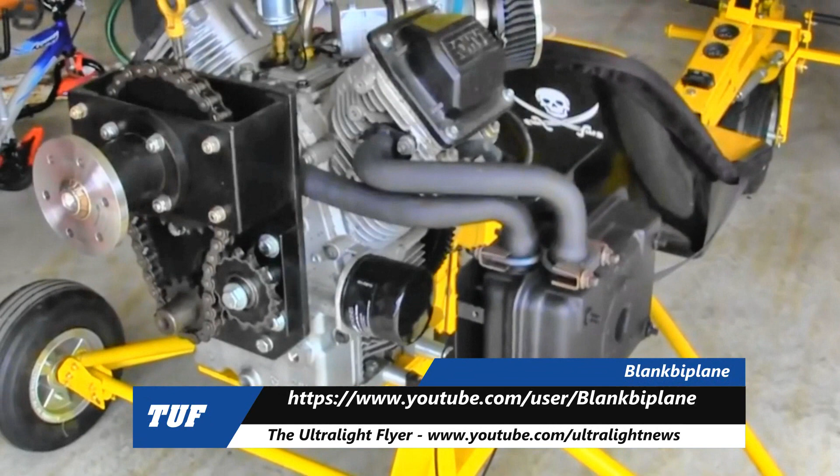This is a follow-up video from my first one on this trike. This is a Kohler 4-cycle engine. It's the 27 horse is what it initially started out with. If you watch the other video, you see a lot of the other modifications I've done.

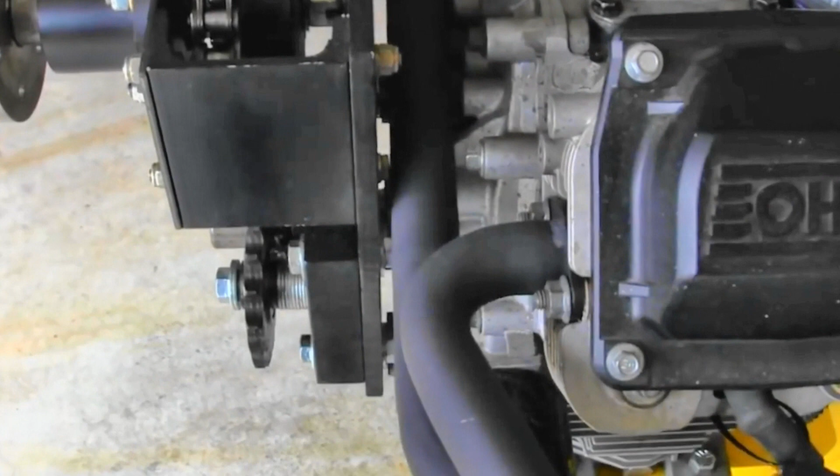Update on this is I've changed the exhaust system. This is a stock side mount Kohler oil filter side exhaust on it now, or muffler system. If you look, it attaches each side there, wraps around, it actually clears the reduction drive. Try to get a better shot in here. Come around, it's a lot quieter, very solid mount. You can actually push the whole trike by it and it don't even wobble.

Changed some other things. Got a 15 tooth idler sprocket on here now just to take up some of the slack. While the YouTube trolls were ripping me a new one on different things on this, it doesn't matter. I've talked to the chain manufacturers and they said it didn't matter that it had the slop in it. It doesn't hurt the chain at all, but this makes it a little bit nicer, neater looking. Adds more work and more weight to the reduction drive, but it doesn't do anything as far as performance.

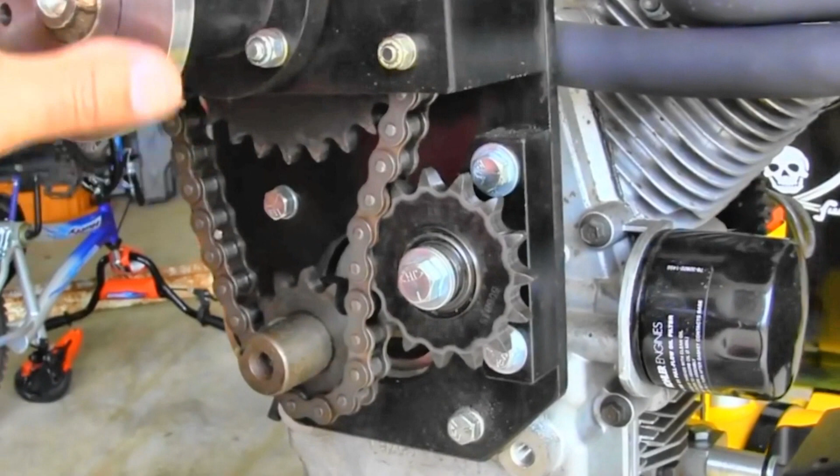You know, the belt, you obviously got to take the slack out of it, but this has still got a little bit of slack on it. Now once it's rotating with the propeller, this is going to pull tight, and then you'll end up with your slack on this side. Probably got a good 20 hours on this chain, and you know, there's absolutely no wear at all. You can see all it's done is wear a little bit of the oxide finish off the idler, and that's it.

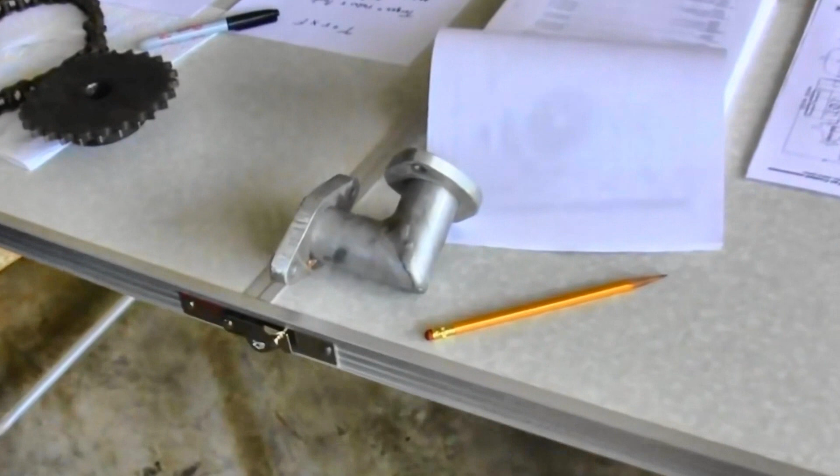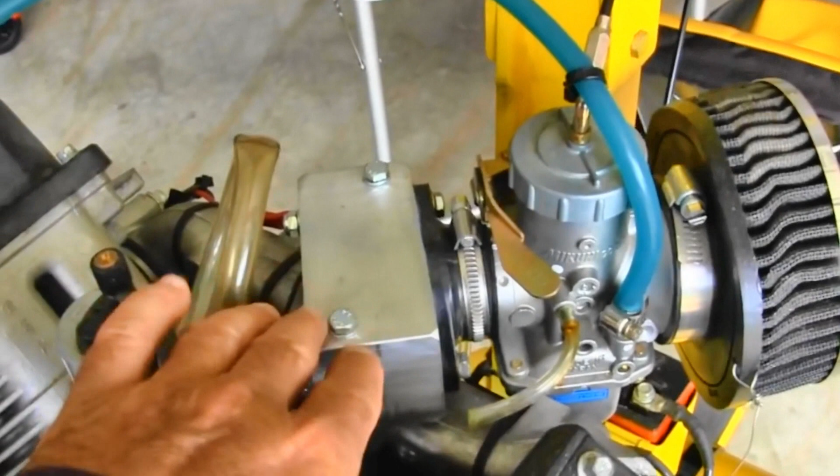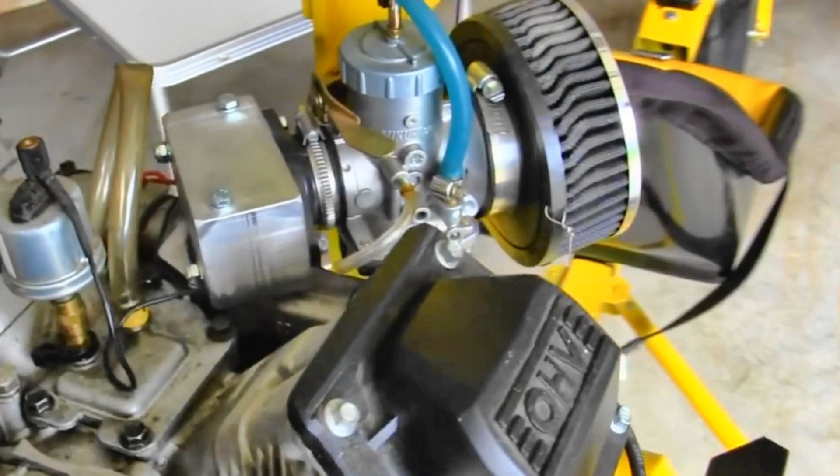Another thing I changed was the intake that I previously had was kind of an L-shaped one. Actually, it was this one over here. I'll show you. Took that off, looked like a plumber's nightmare there, so I changed it out to be a little bit nicer, neater package. Just a block of 6061 T6 aluminum machined out, and mount the carburetor directly onto that. So it kind of brings it a little bit tighter, looks a little neater, makes a nice, neater package to fit under some type of cowling or something if it was on a tractor configuration.

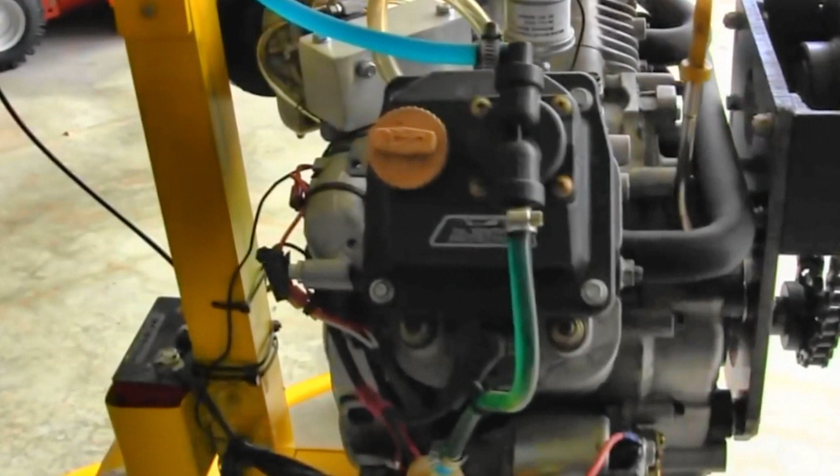It's really the only 2 or 3 changes I made was exhaust, the idler, and then that intake. Give you a little bit overview for those that's the first time seeing this one as opposed to the other one. Around here, I've had lots and lots of people asking why I went with chain as opposed to belt, and what was the limit a chain can do, and on and on. I think even in one of the comments I put a YouTube link to drag racing motorcycles to show that they're using a lot smaller chain than I got on this, and they're doing 200+ mile an hour in a quarter mile with them.

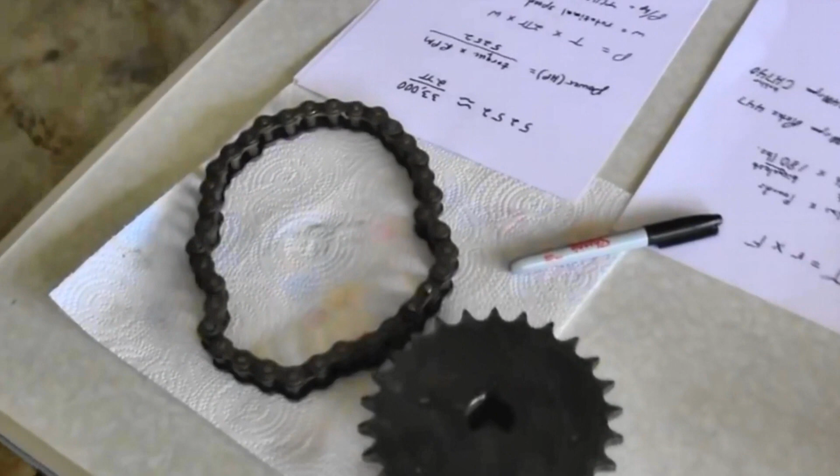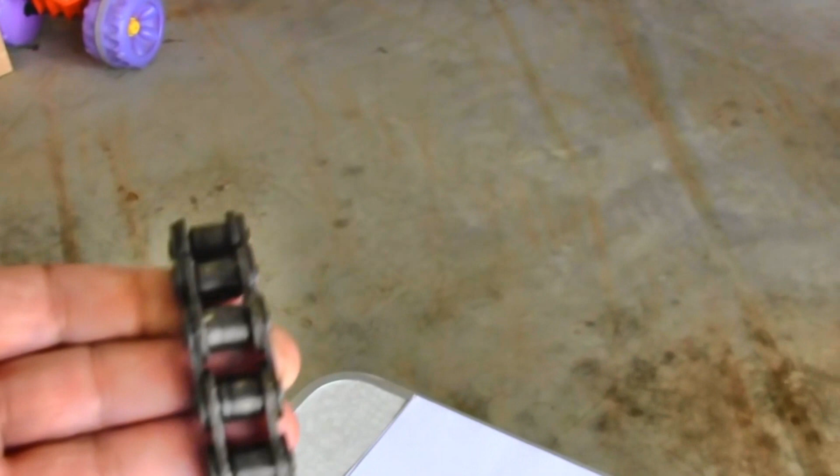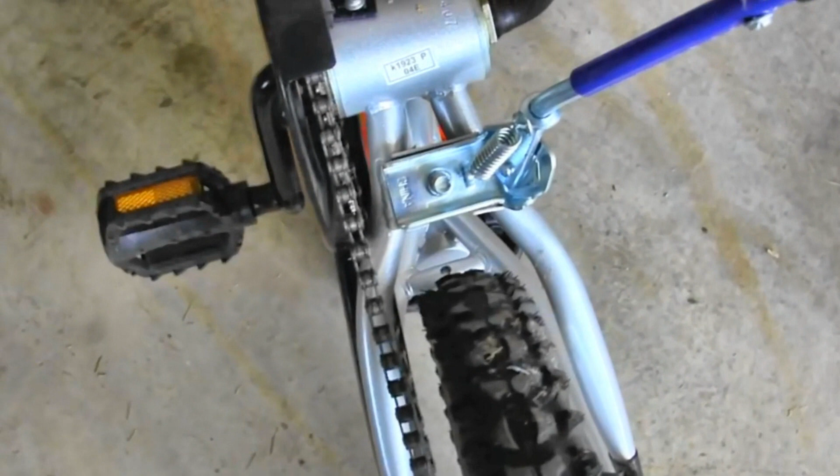And just to give you an example, here's the chain. This is just another chain that I had made on a different reduction drive ratio, so I kind of had it left over. But just to give you an idea of the size, this is 5/8 or 50 pitch compared to my fingers size-wise, and that's one of the previous sprockets I'd had. Let's do an example. This is my youngest kid's bicycle, and I can ride it, as embarrassing as it looks to see me on this thing. I can ride that, but to give you an example in chain size,

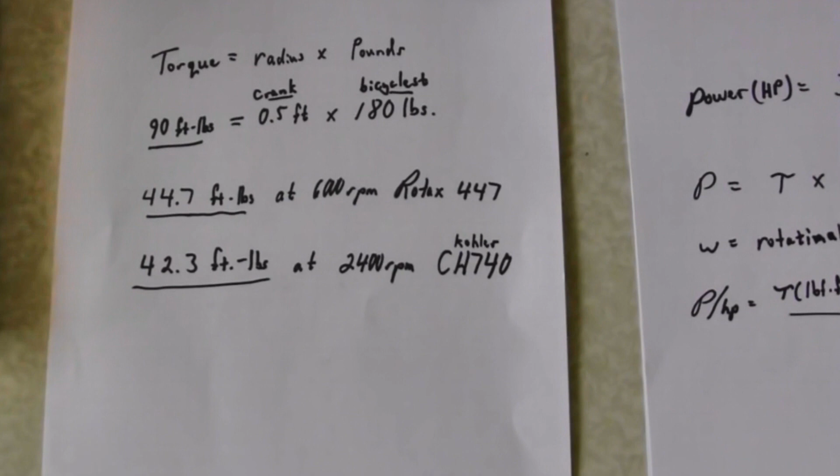and you guys asked for it, so now you're going to get it. We're going to do some math. Okay, just to give you an example. I don't know if you can see this or not, but I'll kind of go over it verbally. We have obviously your torque calculations here is radius times pounds, if we're going to go to foot-pounds of torque. And the Rotax 447, which is what I was trying to do here with this 4-cycle engine, was to mimic the 447 because they no longer make it, and to get away from a 2-cycle and the benefits of the 4-cycle.

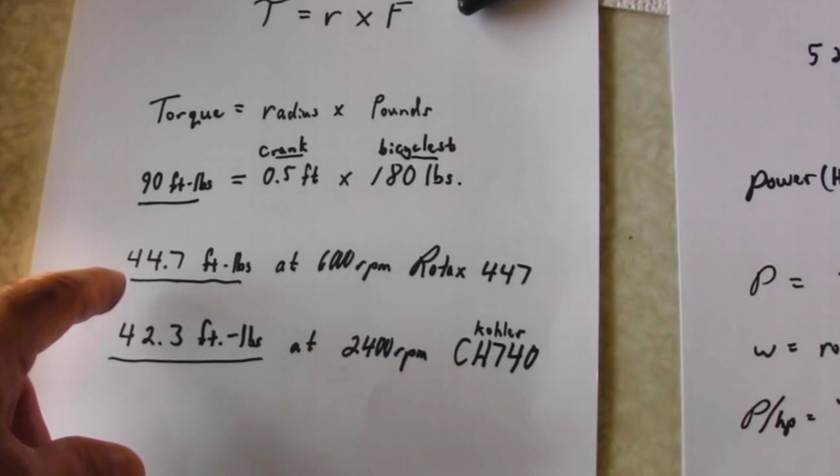Its peak torque is 44.7 foot-pounds of torque. This one here I've got from Kohler in their manual, and that's also from the Rotax one there.

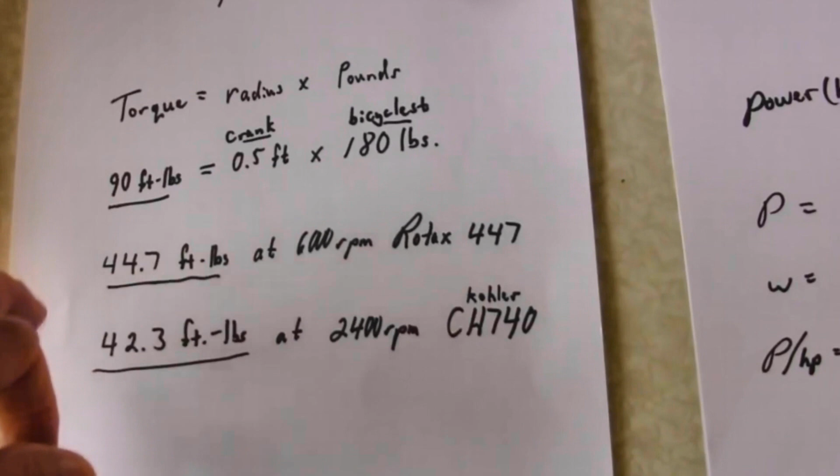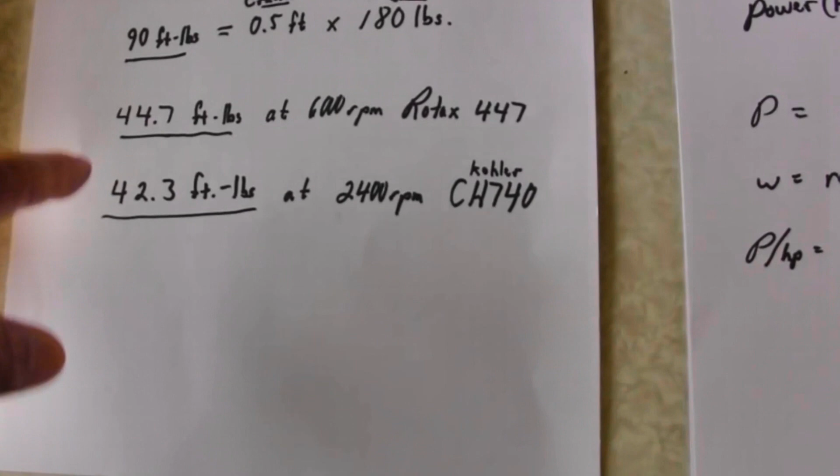It's 42.3 foot-pounds of torque. And then this one's for the 2 carburetor configuration. So it's their maximum they can get out of that particular configuration without other personal modifications people might do to them. Okay, so to give you this example, these are real close in comparison here as their maximum torque.

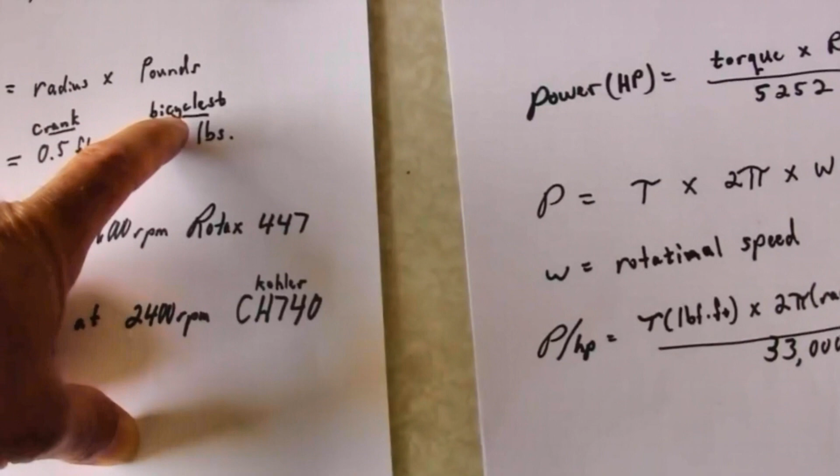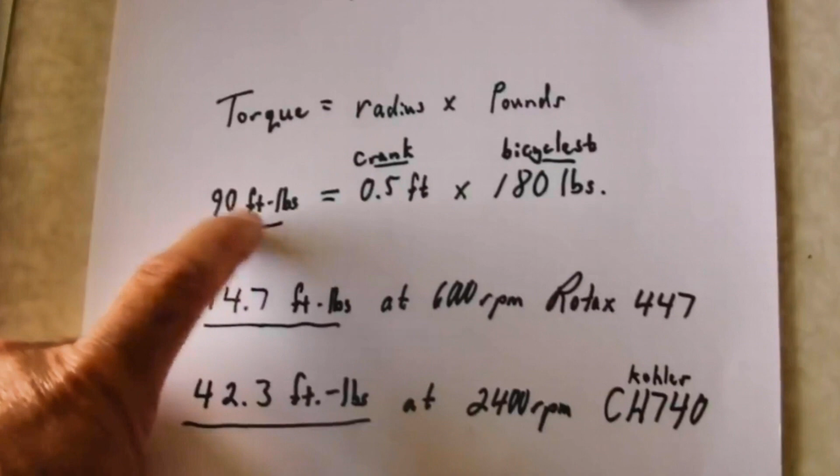Okay, now, a person that weighs 180 pounds riding a bicycle, and the crank on your pedal is about 6 inches, so that's a half a foot. That times that, you end up with 90 foot-pounds of torque. So when you're comparing chain to chain, I really don't even need a chain that big on there. Actually, half that size is all I need to run this.

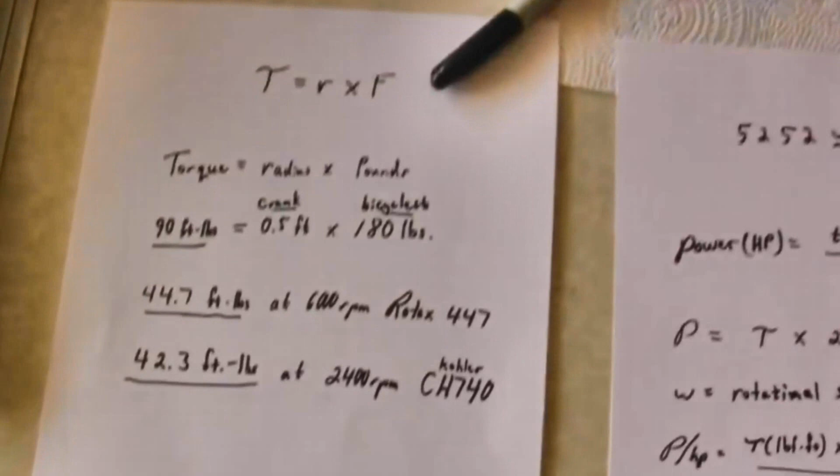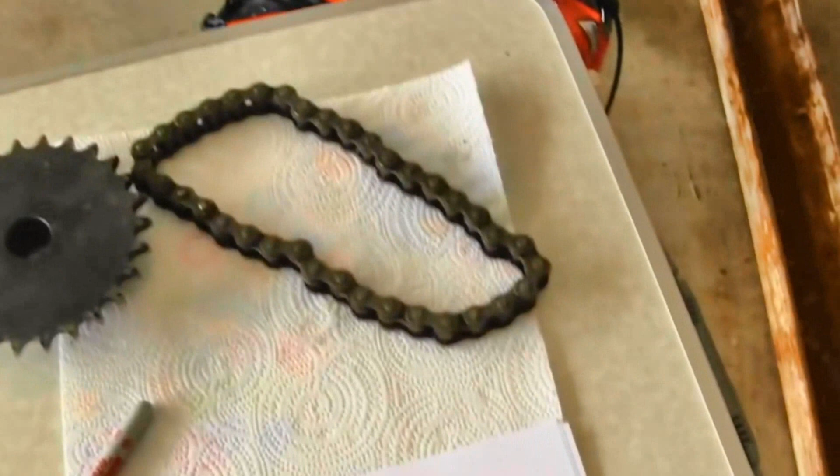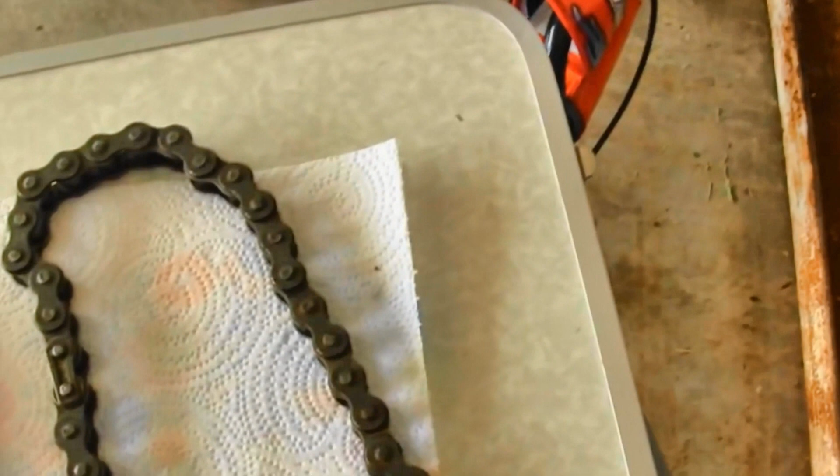Now obviously that's way overkill for what I'm trying to do here. But I don't want the problems of derailing or some kind of issues like that with alignment. This is a lot more forgiving because of the surface area of each roller, to be forgiving for slight misalignments or vibrations or something. Plus I never have to worry about this ever wearing out. Take a lifetime to probably wear that chain out. So just doing the math, and there's no magic, everything's math.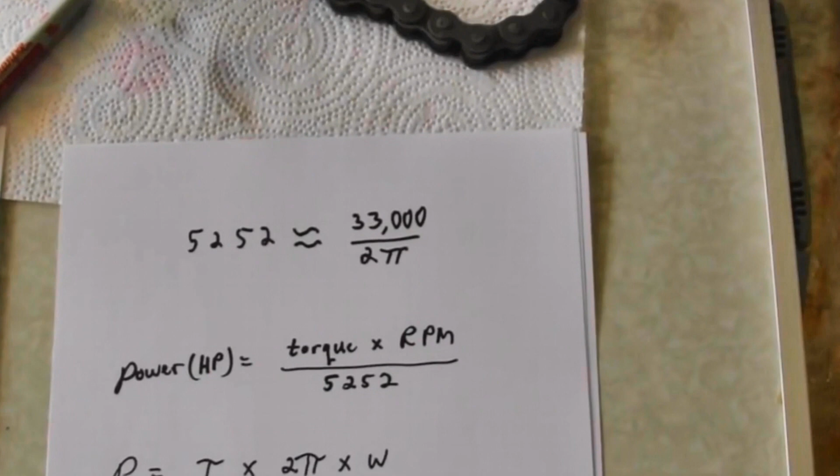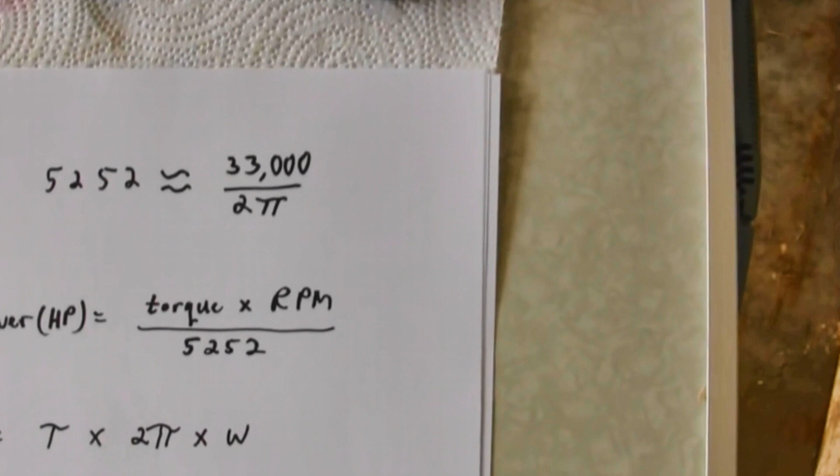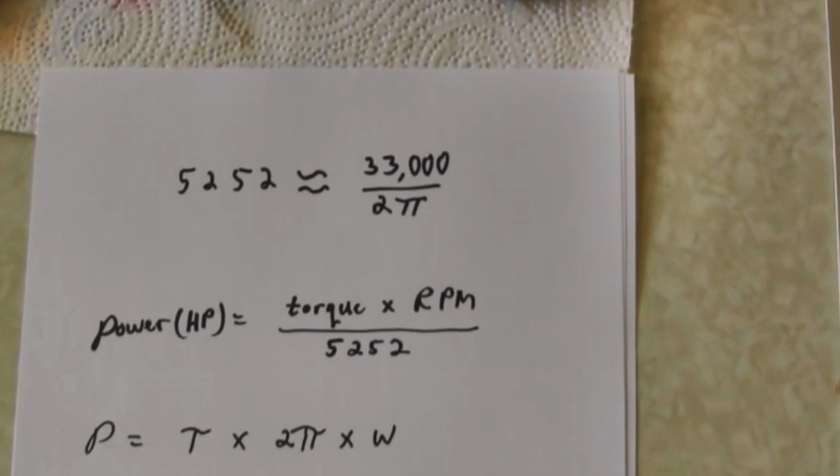Another thing is, I'd mentioned in the previous video the 5252, that's getting into where the calculation for horsepower was divided by 2 pi radians. When you're getting into the horsepower, if RPM ever reached 5252, these two would cancel, you end up with torque equals horsepower. So whatever your torque is, your horsepower would be at 5252 RPM. Like I said, I do all the math and everything's real simple, straightforward to me.

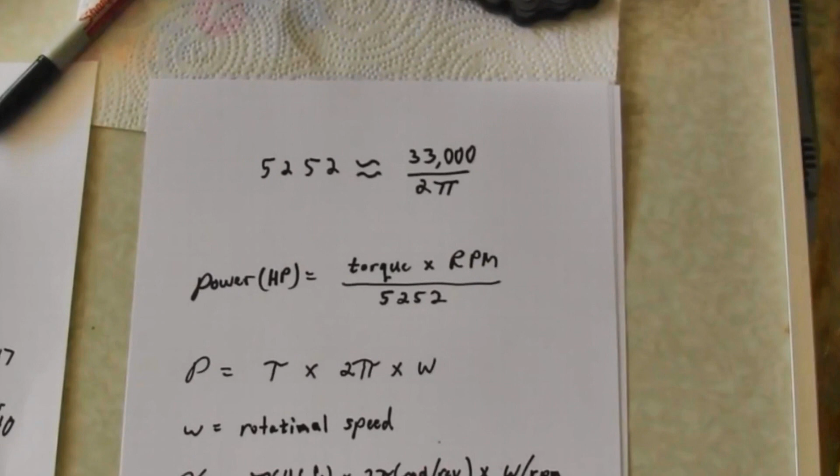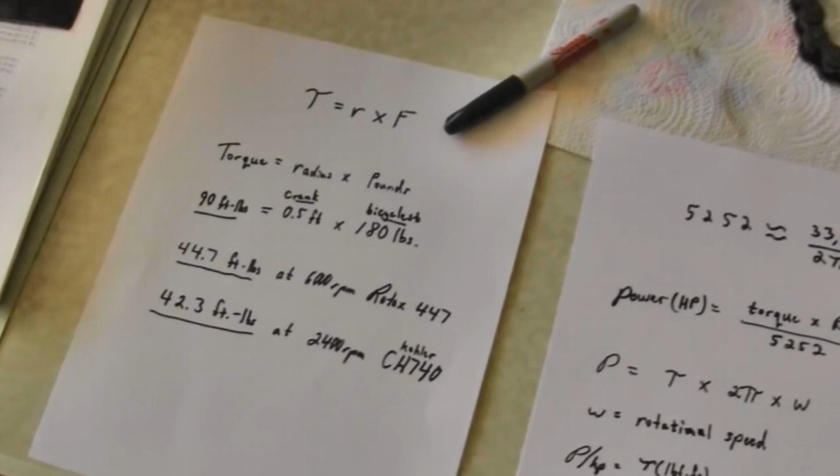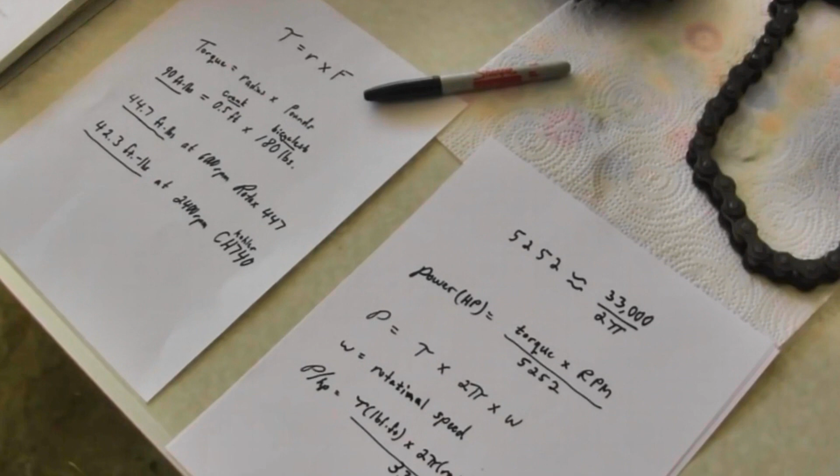A lot of people had superstitions and folklores about the chains and stuff like that, and talking to people that manufacture chains, they got a kick out of it. But your chain's never going to wear out. Same as, we've been riding on motorcycles for 100 years, and the motorcycle people hate belts, and the airplane people hate chains, and it's all superstition in both directions. When you actually do the math on it, there's nothing wrong with belts. Belts work great. I just don't care for the belts for lots of ergonomic reasons.

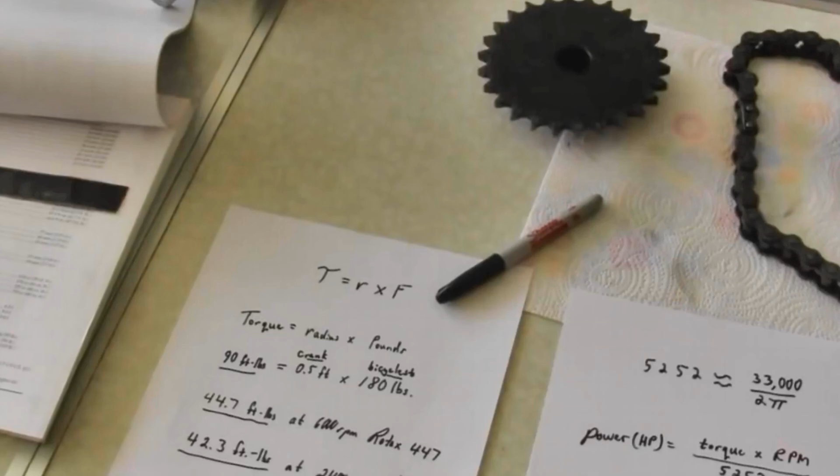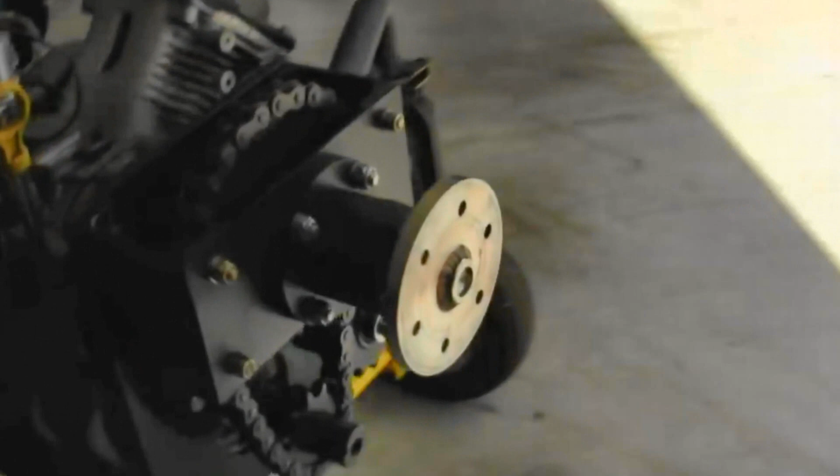If you're not using a timing belt, then you got the potential of slippage. In a pusher configuration, if you get any oil leaks, it could spray onto the belt, which could cause slippage. May or may not be any kind of an issue at all. I've had belts on things that work great. So I got nothing against the belt, but the reason I went with chain was just because it was very simple to design.

I didn't have to worry about alignment issues like I did when I was trying to develop a belt system. I had one of the belts get ate up on me and it was perfectly aligned. I maybe had a bad belt and it just came apart, but it was not something I wanted to experience in flight.

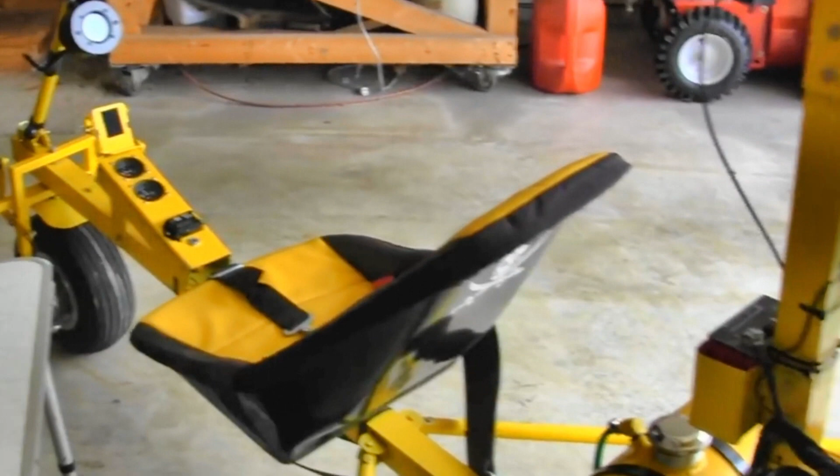I got the propeller off this just so you guys can get a better look at it. I'll put the propeller back on, fire it up, and if there's no neighbors around, I might shoot around the neighborhood in it. Obviously it's a wing-off, but just give you kind of a follow-up because I had enough requests asking for one, and just to show some of the more modifications to it. I figure I'm pretty much done with whatever I wanted to accomplish with this, so I'll probably end up selling this particular trike because I got another project I want to start on.

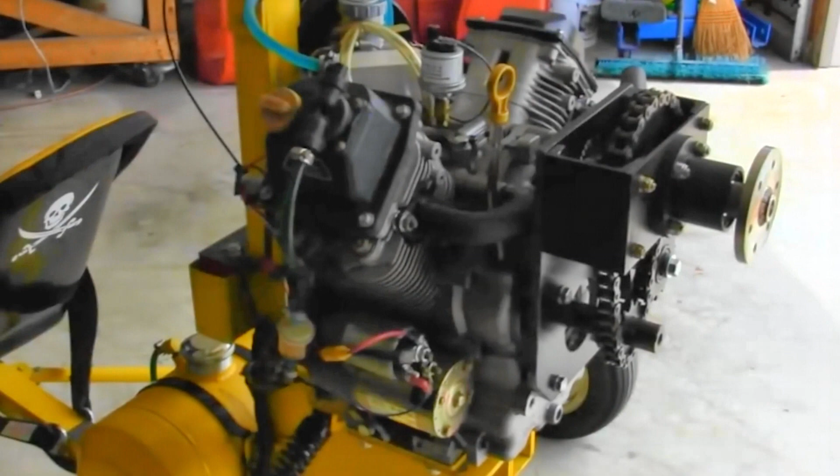Anybody that knows me knows I just enjoy designing and building, and once I'm done with them I usually sell them and start another project. It's kind of like one of these things where I just enjoy the challenge of it more than the piloting part of it. More of a designer builder than pilot. Actually kind of stink as a pilot, so better at designing and building.

So anyway, just give you a follow-up and then I'll fire it up from there, and I may not say much after that.

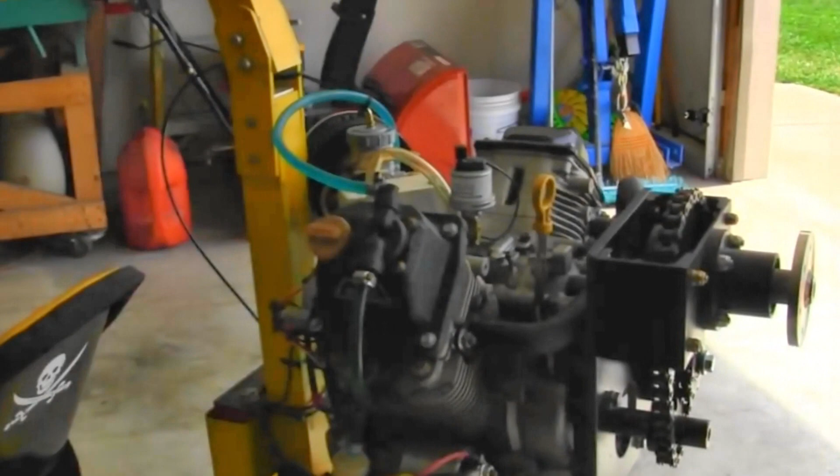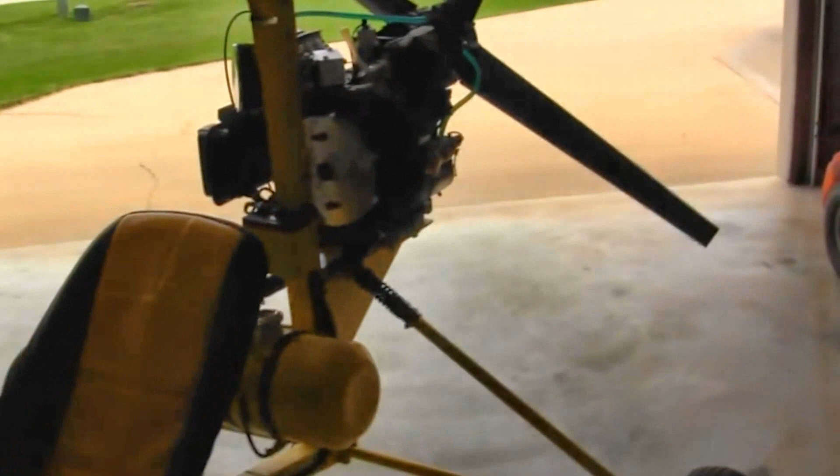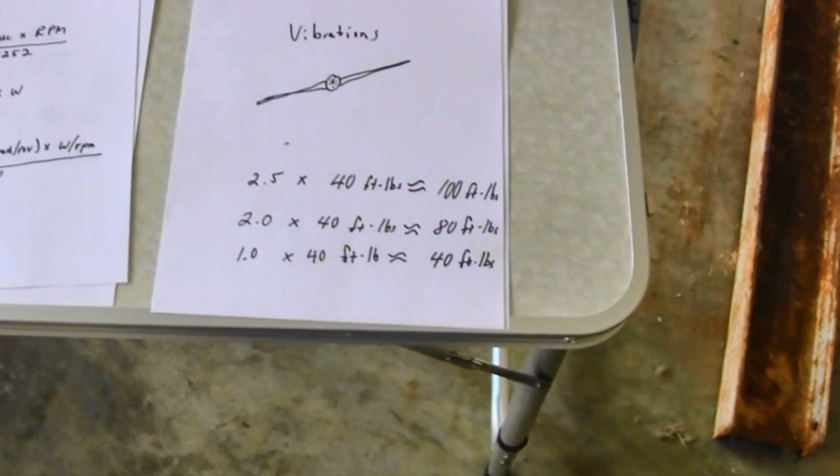Sorry I didn't get this fired up yet. I got the propeller on, but I thought of a couple other things that I need to go over real quick, just from the questions I've had. People were asking about vibration from the chain. It doesn't matter if you got chain, belt, geared, doesn't matter. If you're getting vibration, 99% of the time, and this is my experience with lots of different propellers, your vibrations come from your propeller, not from your engine.

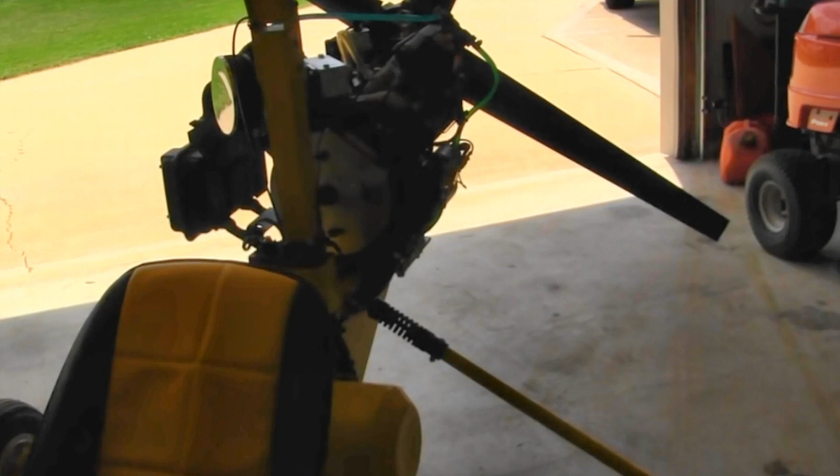Because if you can take the propeller off the engine and run it and you get no vibration, or just minimal like you would a riding lawnmower or anything else, that's what you should be getting, because the internal parts on the engine are already balanced, so there's nothing else there that can vibrate. And even with a single piston, that riding lawnmower is a single piston, and they don't shake or vibrate, just the normal pulses that you feel, but it's nothing uncomfortable.

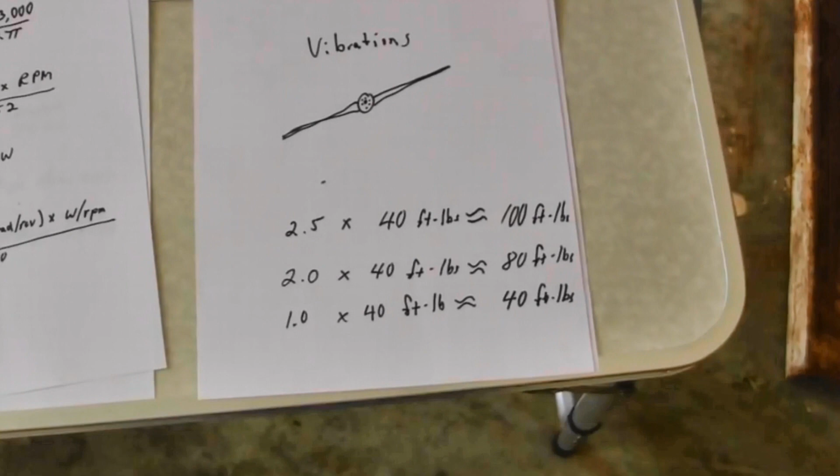The vibration almost always comes from the propeller. I've bought everything from these Ultra Props all the way up to the Powerfins, and I'm trying to think of the other one I had that was like a $1,000 propeller. Every one of them out of the box was out of balance, and I had to balance them. Once you balance them, they're smooth as glass, because it's just another flywheel. So if you balance it, it's just going to stabilize it even more.

Another thing is, people have asked me about direct drive right out of the engine. Two things. One is, when you run direct drive out of any engine, you have to have a thrust bearing in there. That means all the load being pulled or pushed on the crankshaft is being absorbed by some type of bearing that is not just your radial bearings for your connecting rods and such. It's actually a thrust bearing at the end or the beginning of the case of the engine to compensate for that amount of pulling or pushing that's going on.

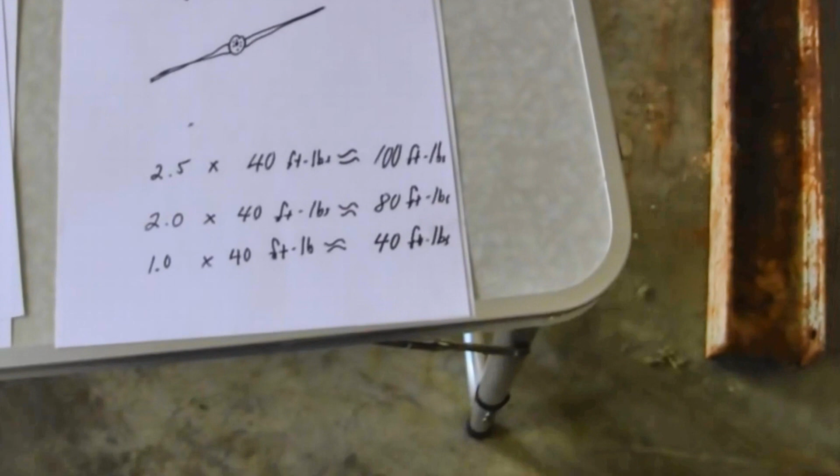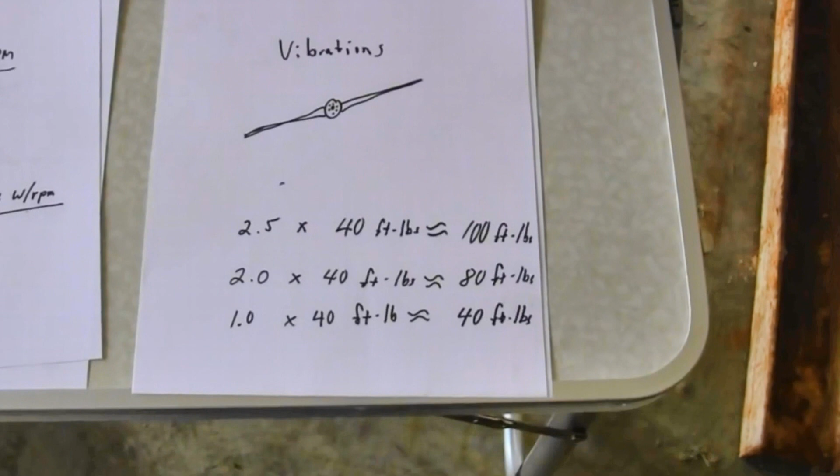When you're running through any kind of reduction, you don't have to worry about that, because it's all radial forces and you don't have a forward or backward pull or push on it. The other thing that happens is, let's do the math again. This is a 2.5 to 1 reduction, so you're taking the 40 pounds of torque roughly at 5,000 RPM, and you're getting 100 foot-pounds of torque at the propeller.

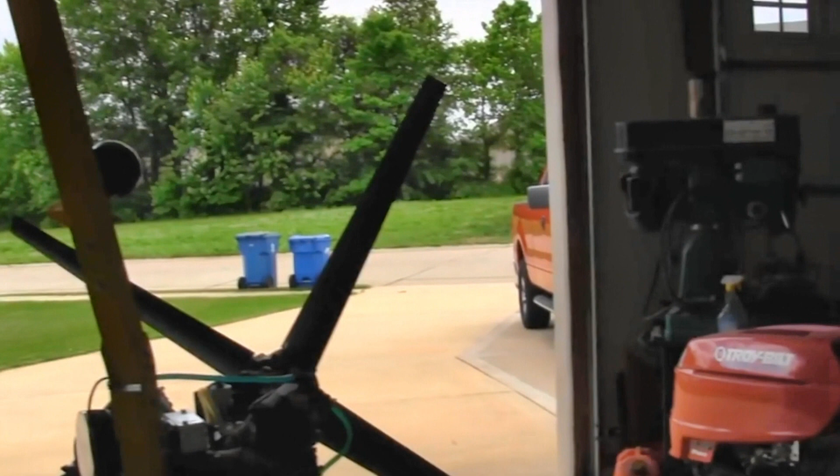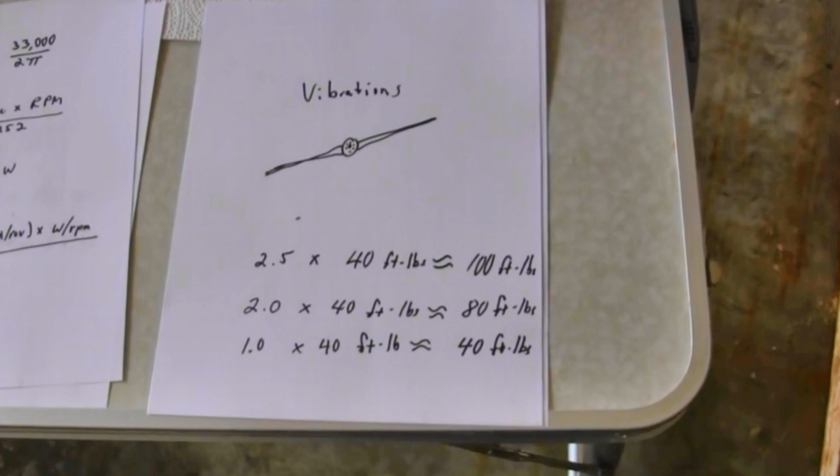Now the larger the propeller, that counteracts that, because imagine putting your hand on a small propeller and rotating it versus one that's way out there. It's a lot easier to rotate one that's further out based off the torque formula. So you're counteracting that with more power to the propeller, because the whole radial area of the propeller is compressing all that air. A smaller propeller, or a single-blade or 2-blade propeller versus a 4-blade or 3-blade, you can see that it's a lot more area being compressed. So obviously the bigger the gear ratio, the more power you're getting right to that propeller.

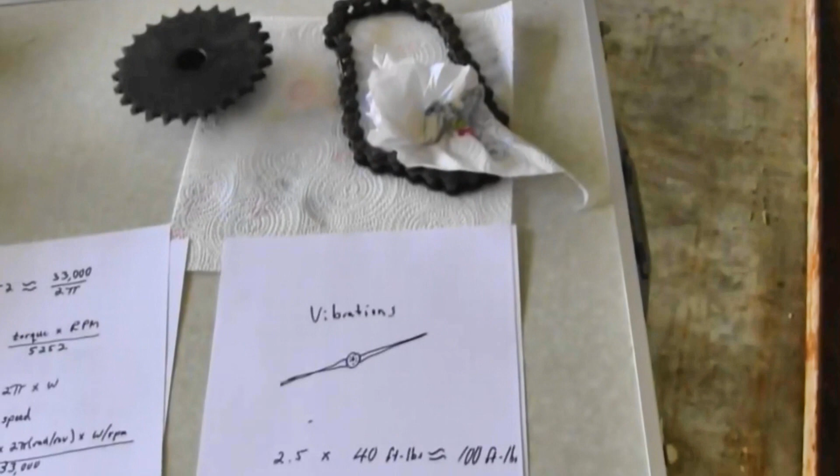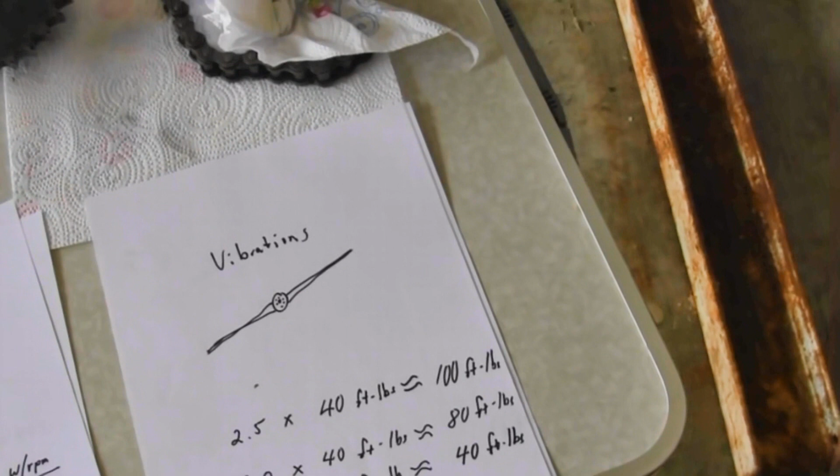At 2.0 to 1, you're only getting 80 pounds of torque at the propeller, but you're gaining speed. Your compromise is that you're able to run the engine a little bit slower. You can't run the propeller tips faster than the speed of sound, or you end up with, one, a horrible noise, and two, horrible inefficiencies. And if it's a direct drive, you're only right at the 40 pounds of torque, which is not much at all. But again, you get a lot of speed, and if you have an engine that has a thrust bearing, it'll take care of that.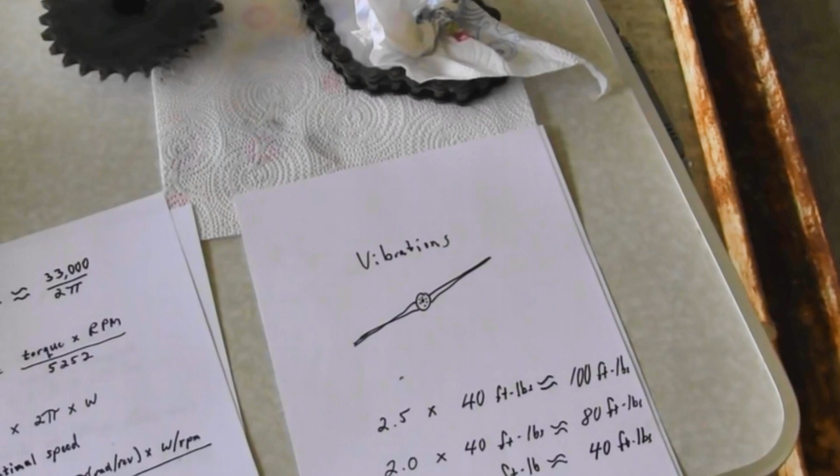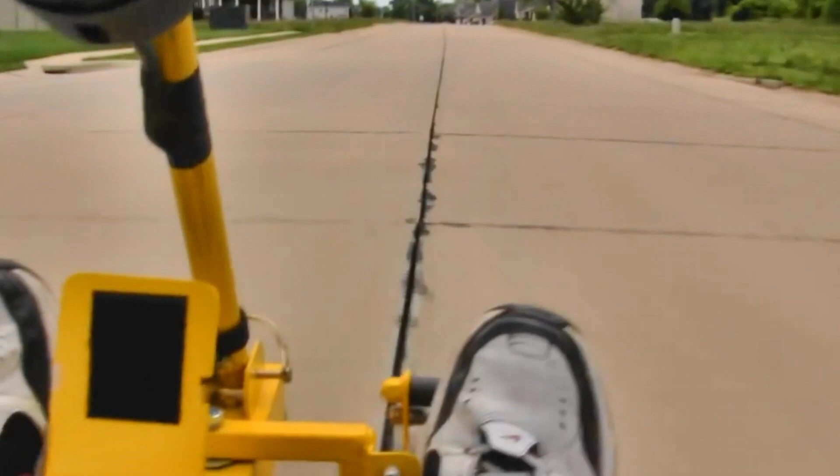So anyway, just some more things to go over real quick before I shut this off and fire this thing up. Okay. Let it warm up a little bit.

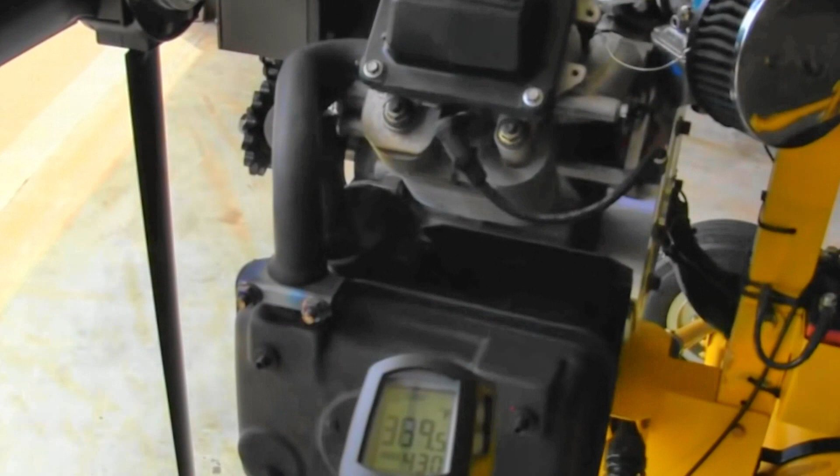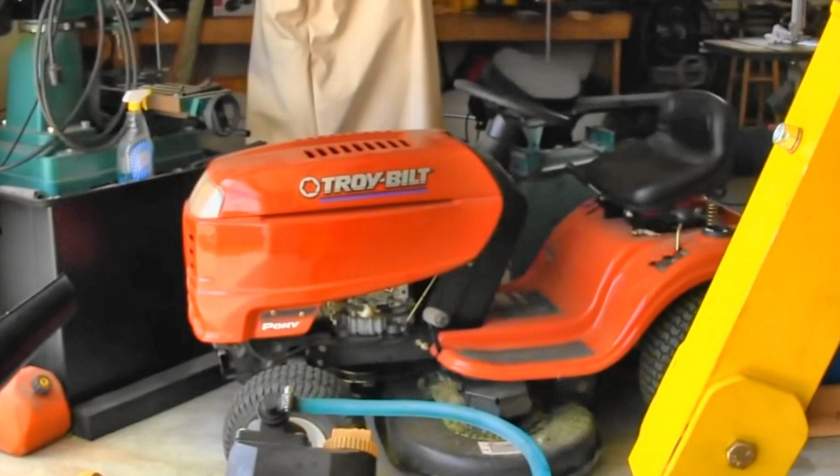Okay, let's check some temperatures real quick, before the neighbors freak out. Let's see what we got. Exhaust temp, around three, almost 400. Cylinder head, 170 something is the highest. Chain, 100 degrees. Outside temperature, 85. What else do we want? Oil filter, about 180.

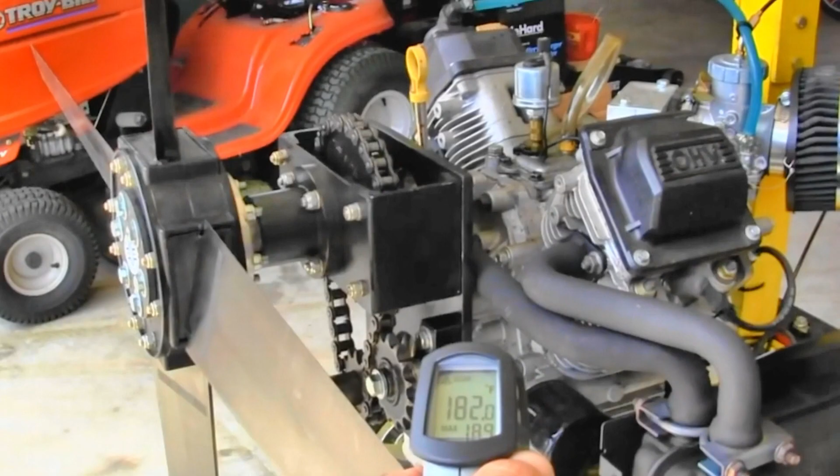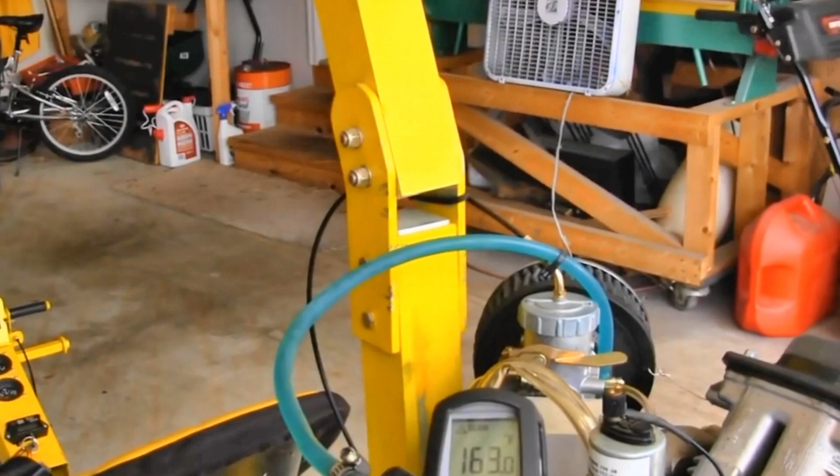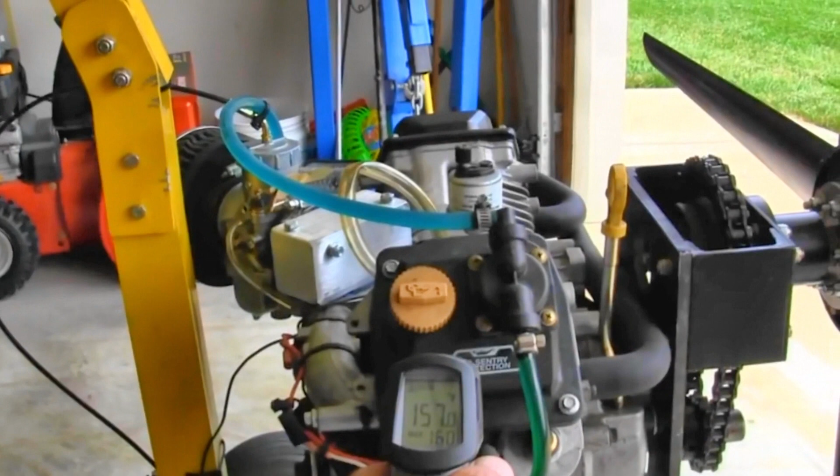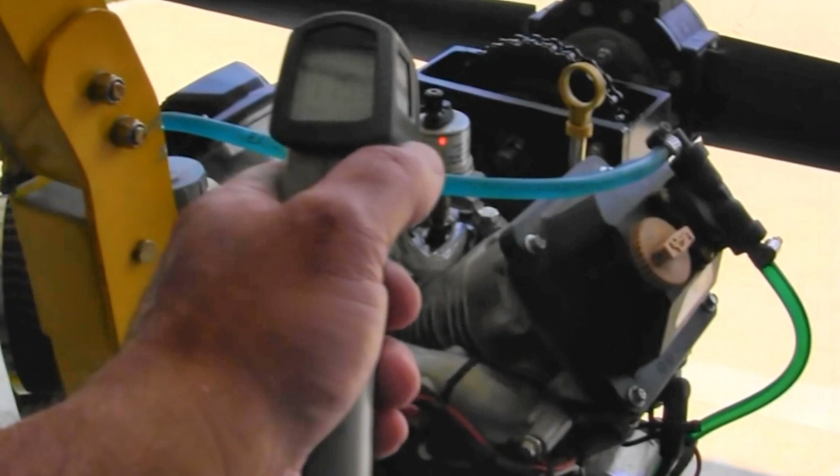Let's see. Intake, about 160, so that's good for not needing any carb heat. The cylinder, about 170 something. Flywheel, 69 degrees. What else do we want? Little valve cover is 157. And same as outside temperature. Oil pressure sender, 113.

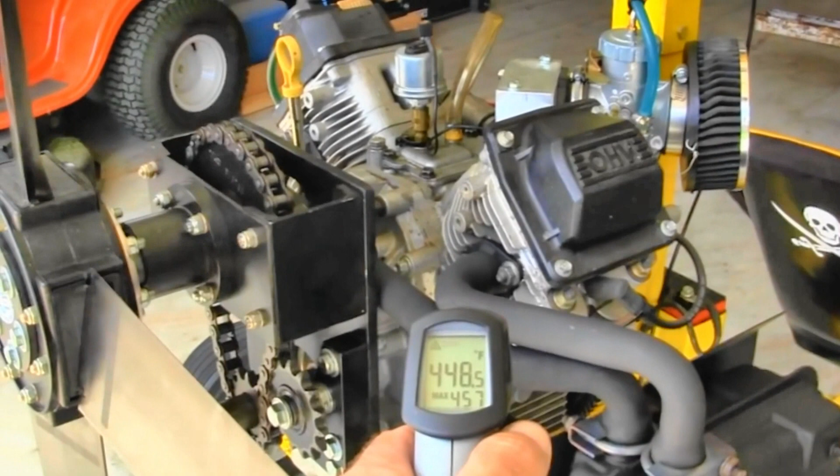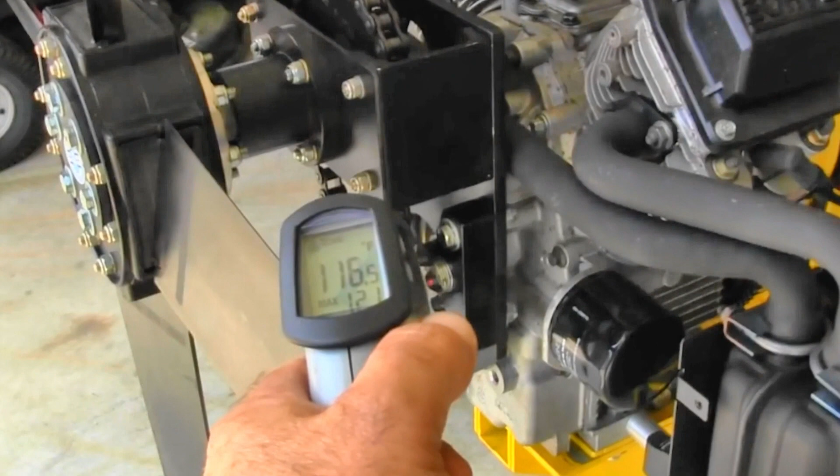Exhaust here, I think it gets up around 600 something, right at 700 degrees out of the exhaust when it's running. That little idler's at like 120. So you can literally touch these things right after it runs. I wouldn't grab the exhaust, obviously, but not too bad. So it could use a little more warm-up time to get a little more throttle response, because a 4-cycle, if it isn't warmed up, is going to get kind of a bottom-end chop to it. Okay, that's it.